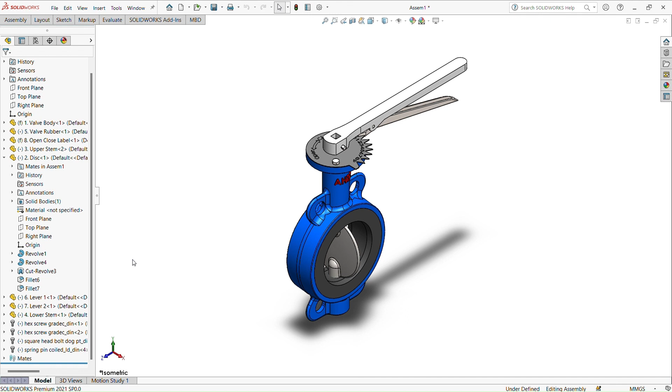So I'm going to design a butterfly valve for this project. I'm going to design a simple butterfly valve in Solidworks. I will give animation also at the end showing the open close relation. I hope sir will like it, and I'm gonna do every part at the end and then assemble it. Okay?

Alright, so this is my first part of the butterfly valve project. This is the valve body. As you can see, it's blue color, and I will explain it one by one.

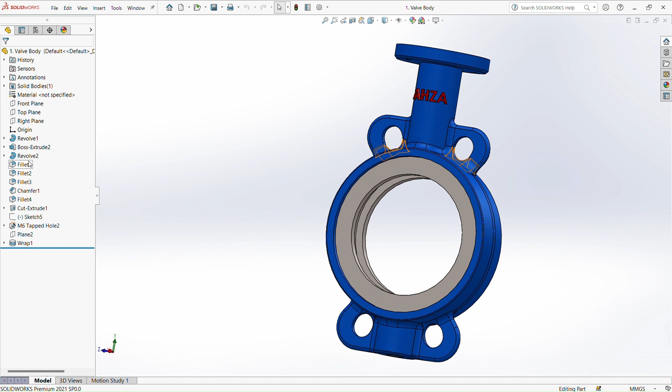Okay, we go to the revolve, the first part first. Edit sketch. So this is our first part, we created this one first. By we draw this part, and I already set up the dimension here. It's 6 millimeters. I do the right part only and the left side part actually only, because I mirror entities from here to here.

First of all, I just draw the line here, here, here, here, here, here, and here, and then I mirror entities here because I already created the center line from the top to the origin, from the origin to the left side. After I mirror entities with this axis, it will create another part here. So I already set the dimension for this bottom as 8.8 millimeters, this one 16.04 millimeters.

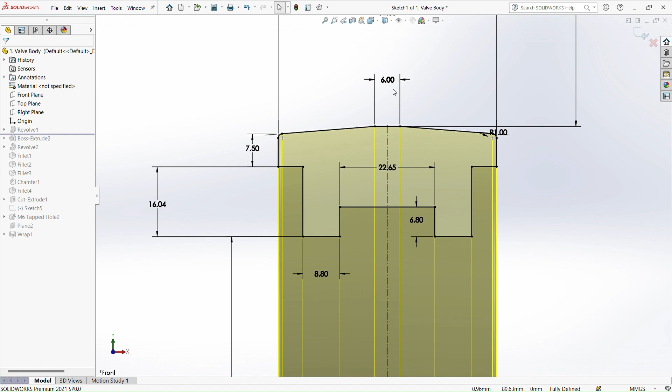Here 7.5 millimeters, and here I don't set it first. After I put the mirror entities, I put 6 millimeters, and down here is 22.65 millimeters, and from the bottom to the origin is 55.7 millimeters. Then I put some chamfer here, I mean I put some arc here for 1 millimeter.

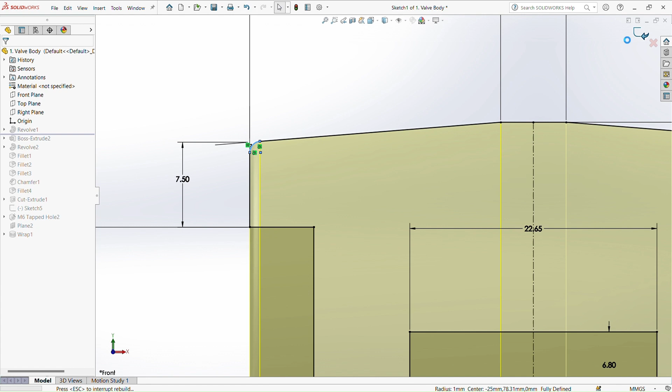Alright, so exit sketch, and then we go to the revolve part. Edit feature, we go to revolve, so this is our axis to make it round shape like this. Click OK and it's done.

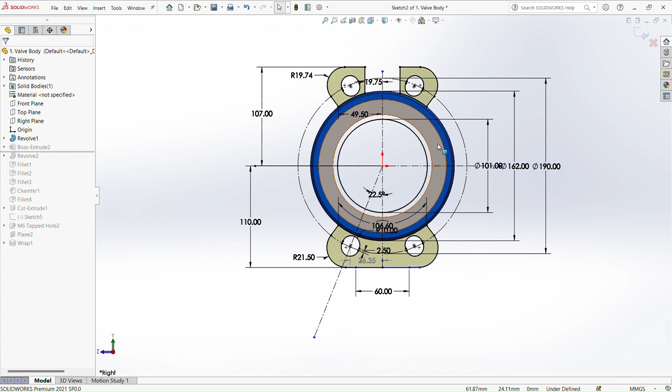So I create this using some slot, line and circle. We can see here, I just draw it freely, upside and downside, but lastly I put the dimension so it will be more arranged. Then I extruded it, exit sketch, edit feature, for 6 millimeters only.

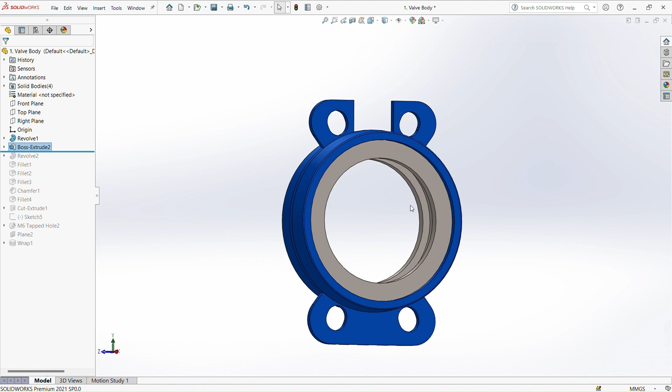Alright, now you can see the body is almost done here. We move to the second revolve, the upper part. Here we go to edit sketch. First of all, I draw the same one, save. I draw a line here, and put some dimension, 20.5 millimeters up here, 45 millimeters, here 12.7 millimeters, and from the top to the origin is 171 millimeters.

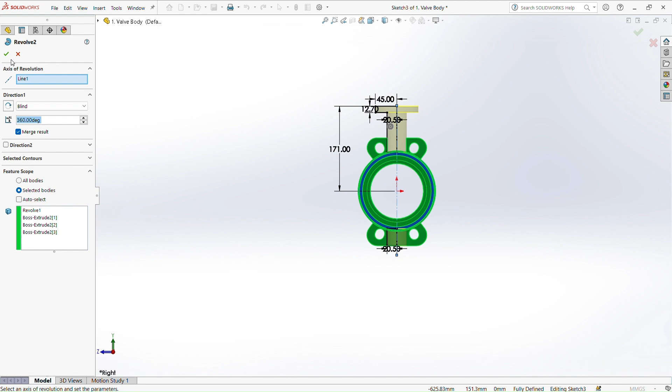And then I go to the revolve part, edit feature. Okay, you can see here I put the merge result, line and selected the bodies. Click OK. You can see it's already revolved here.

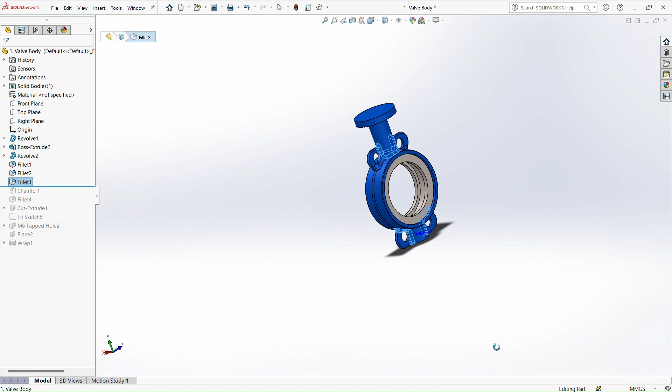Okay, we move to the fillet. 1, 2, 3, alright. You can see I put some fillet here, there's 3 fillets because I do it one by one. 1, 2, 3. I use 6 millimeters for the fillet parameters. Click OK. Now it's a beautiful fillet here, and then we go to the chamfer, which is upside and down part.

And for this chamfer, I just use only 2 millimeters. Already done. And then we go to the last fillet, which I do it late, but it's okay. Edit feature, also using 6 millimeters for the fillet parameters.

Alright, then we go to the extrude cut, because we want to make a hole from top to the bottom. For this one, first of all, we go to edit sketch, top plane, and I draw the circle up here, 16 millimeters for the diameter, and then exit sketch.

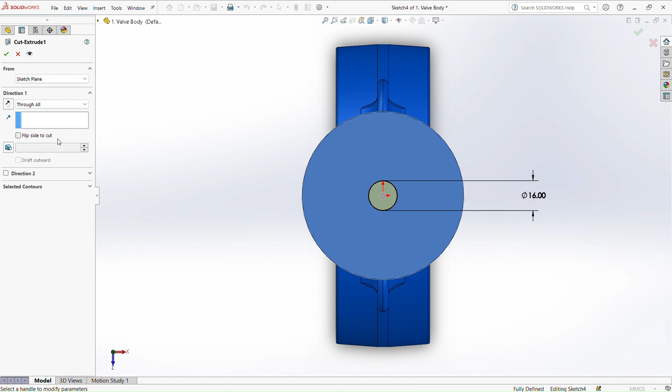And edit feature, we put through all, and it will cut all through the body like this. We click OK. Okay, we can see there's a hole through here and here.

Okay, done. We move to sketch 5. Sketch 5 is a little bit complex, but it's fine. To make it seem easy, we go to normal to. I draw the circle with center line with 70 millimeters diameter, and then I draw some lines here, 45 degrees, 45, 45, and this is one straight line, and to the left side line. Why am I doing this? Because I want to do some tapped hole here.

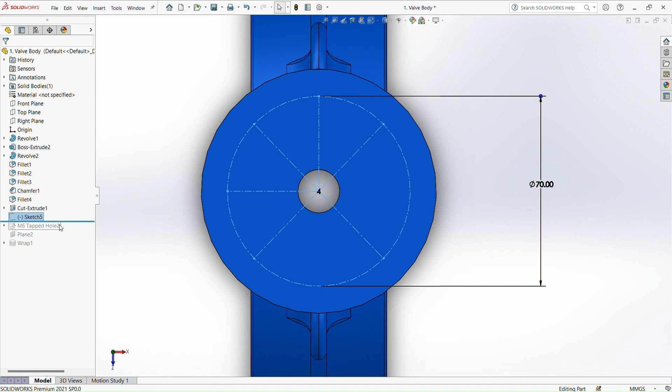Alright, so how do I do the tapped hole? We go to edit feature, hole specification, hole wizard. I choose tapped, straight, standard ISO, tapped hole, size M6.

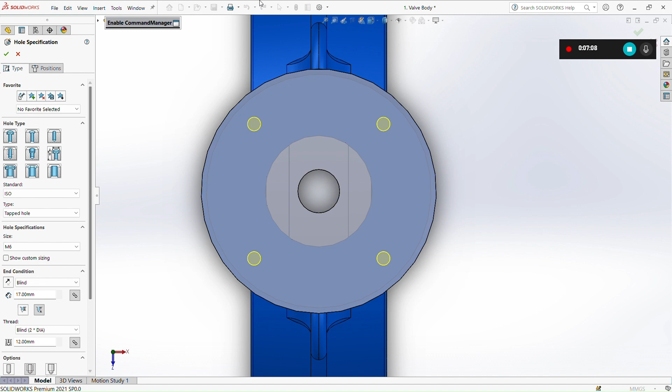Blind, and the distance is 17 millimeters. Then for position, I put some holes here, here, here, and here, which we already sketched before, and click OK, and there's a hole.

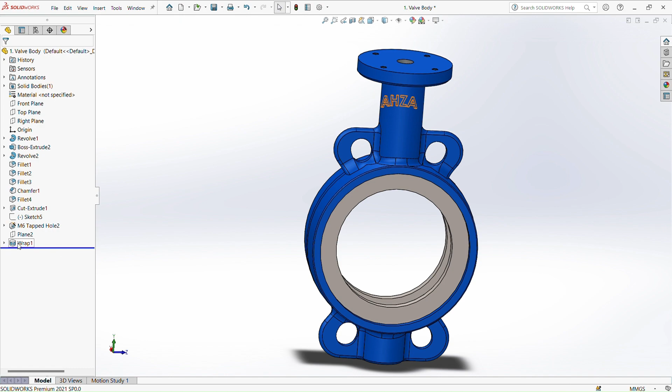We move to plane 2. The next step is I want to do some branding, which is right here. I put the right plane first, and then I go for the wrap. For this I put my own name, Ahza.

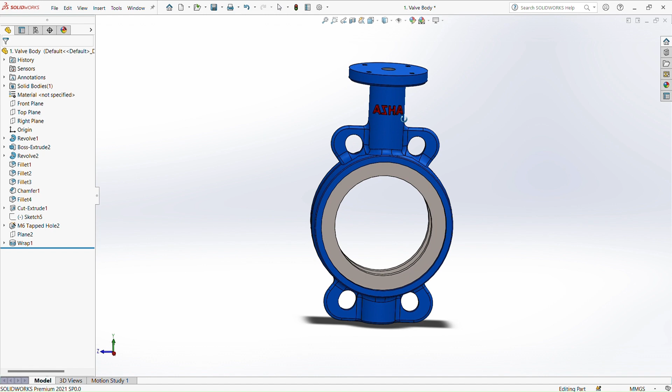I don't know why my name is already like this, but it's okay. All I want to show is how to do the branding. So we go to the wrap.

Right here, we do some writing, and go to the wrap type emboss, wrap, sketch 14, and select the face. For the distance I just put 2 millimeters.

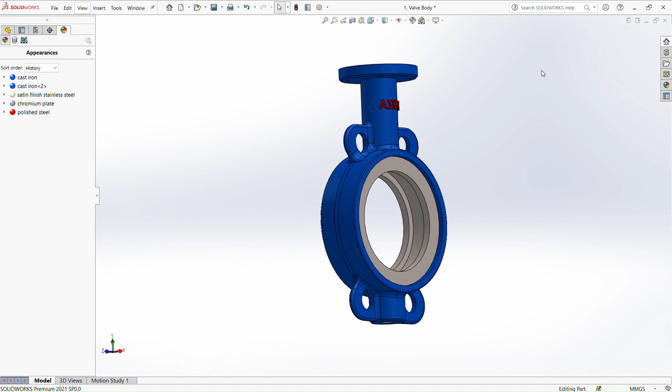So it's done, I hope you get it. Before that, for the appearance, I'm using cast iron, the blue one.

So this is my second part, the butterfly body. This is the butterfly disc. So how did I do this?

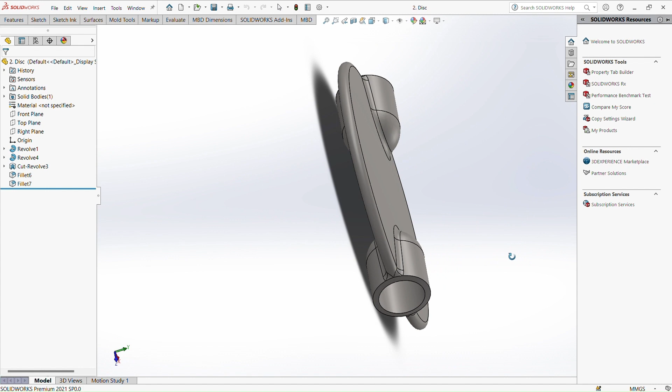First of all, I will go to the revolve, edit sketch. Then I create the center line here, using center line from this part to this part, based on the origin.

From the middle to the left side for 48.35 millimeters, then this line I midpoint using 8.00 millimeters, and at the end of this left I create the circle, which I already trimmed, with 4.3 millimeter diameter.

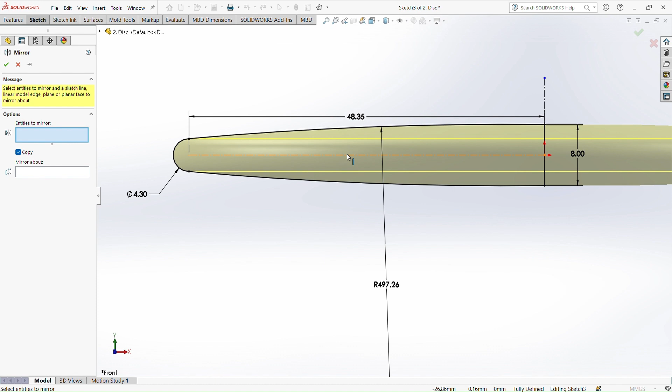Using 3 point arc, I select this point to this point and the middle point, then choose 497.26 millimeters. Then I go to mirror entities, mirror this line about this line, so I can create this arc with the same length and same radius.

Then I revolve it within this axis, and this object is created like this.

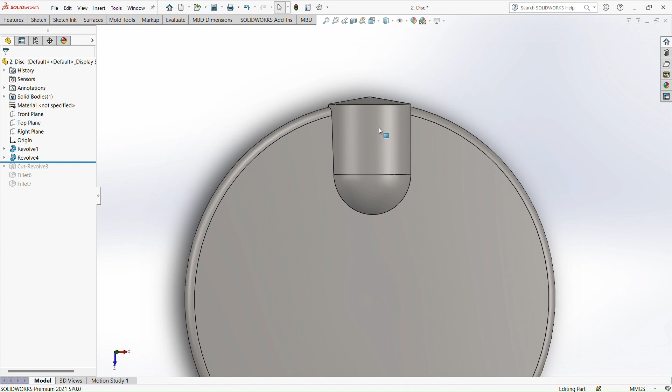Okay, we move to the second revolve, revolve 4, where we create some space here, some object here for the stem side, so this can open and close later on.

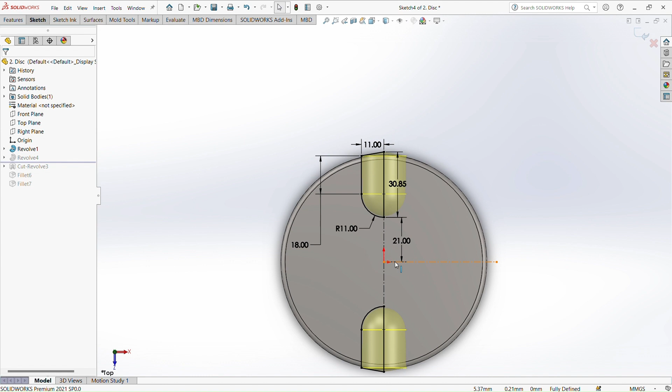So how did I do this revolve? We go to edit sketch. We can see it's fully defined here. We create the center line from the top to the bottom and origin to the right side, then using smart dimension to create 21 millimeters to get this point.

From this point we create the line 30.85 upward, then from this point go to the left side using 11 millimeters, and this point go downside for 18 millimeters, then create an arc using the line, attaching it twice, so I can create an arc for 11 millimeters radius.

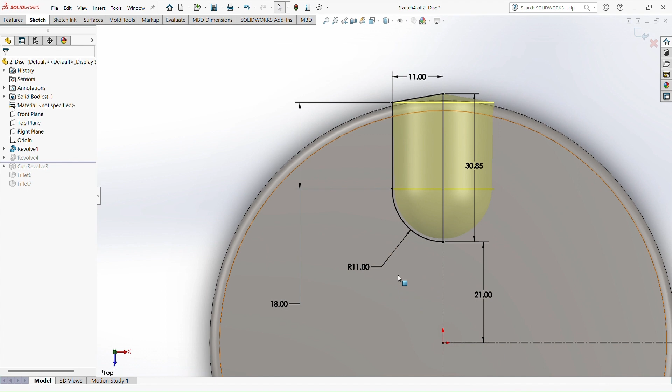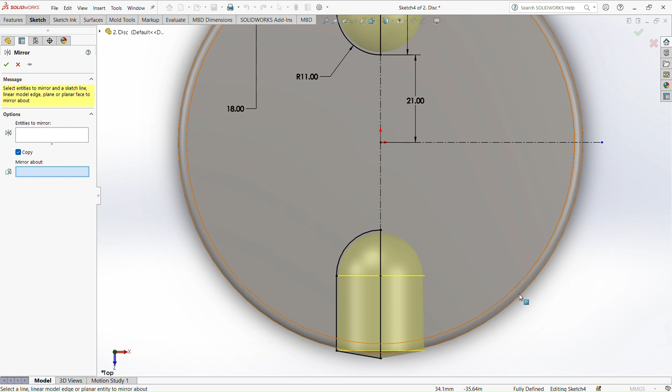Then I select mirror entities, and again copy all this line and mirror about using this axis, so I can create another sketch here without wasting time. Then I just revolve it, and you can see how it looks.

Now we want to make a hole here, inside here and inside here. So how I want to do the hole is, first of all we go to the revolve here and go to edit sketch.

I create the line here for the circle, and then I get another sketch up here. As you can see, I don't put the smart dimension over here because I want it hanging right over the circle.

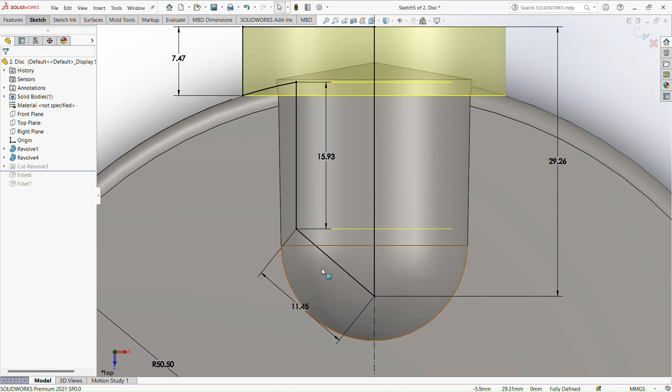So right from the circle I point here for 7.47 millimeters, go to right side 14.4 millimeters, down 29.26 millimeters, incline line here 11.45 millimeters, and then finish the line for 15.93 millimeters.

So I can get this sketch, and after that I go to mirror sketching and mirror entities, copy all this line and mirror about using this axis again, so I can create another sketch down here.

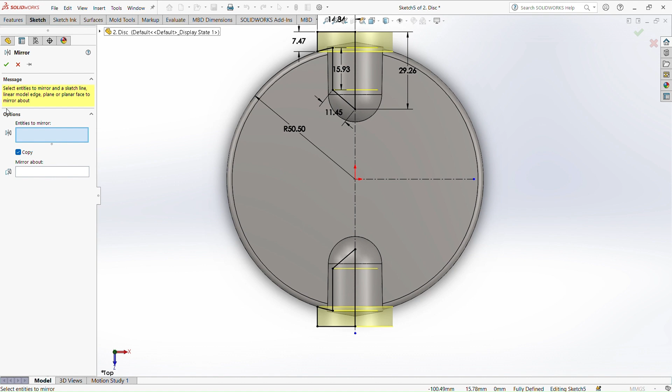Okay, we go on, so I can just cut-revolve here so I can create a hole inside it. Let me see, is it working? Okay, as you can see, I can create the hole here, a space inside here, so I can put the stem or shaft later.

Okay, move to the last part. This fillet 6 and 7 is just the same, because fillet 6 I do the down part, fillet 7 I do the upper part. I do it one by one.

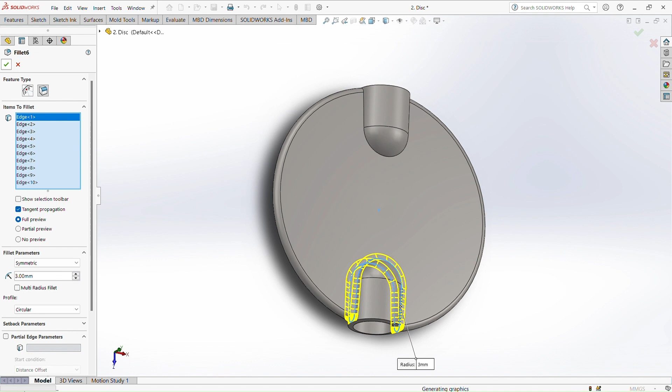For the fillet, we go to edit feature. For the fillet parameters, symmetric one, and I'm using 3 millimeters for the fillet created. Then we go to appearance, and right here I'm using polished steel for the butterfly, all this.

Okay, that's all from this part. I hope it's clear. Thank you.

Okay, now we move on to the third part, which is the upper stem for the butterfly valve. This connects to the lever, and this connects to the body. Let's see how I created this upper stem. It's one of the easiest sketches I've done here.

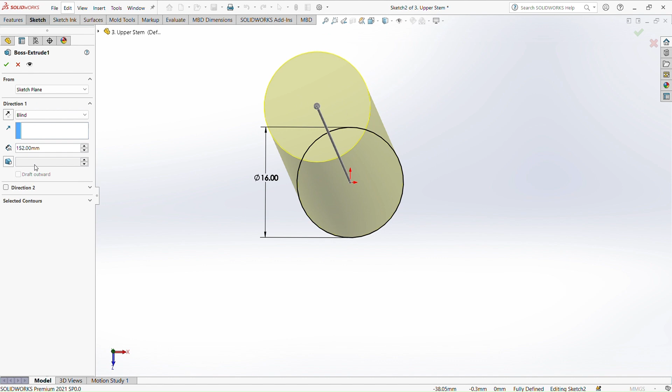So we go to edit sketch. It starts from a circle with a diameter of 16 millimeters. Then I extruded it for 152 millimeters. Click done. Now we get the shaft here, the stem, blank stem.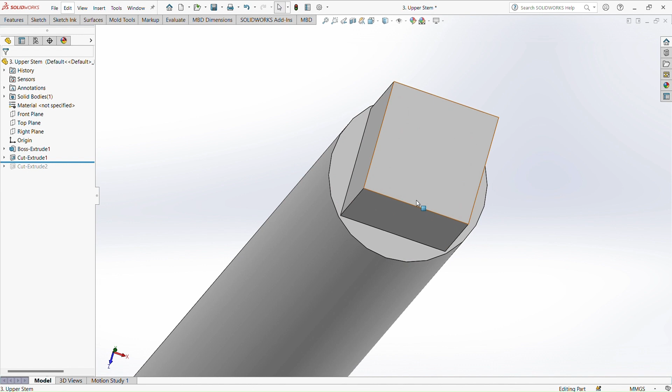Now we move to sketch extrude. I want to delete this part because I want to create a cube at the top of the stem. So how did I do this? We go to edit sketch. I created a rectangle, using center rectangle. From the origin I create the rectangle, and each side of the rectangle is 11 millimeters.

Then we go to cut extrude. We edit sketch, cut extrude, edit feature. Now the distance for the extruded part is 12 millimeters, and we uncheck flip side to cut, so the cut is on the outside, not the inside. We click done, and it worked.

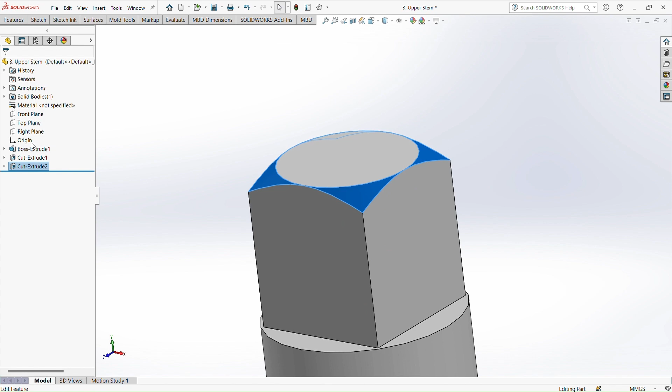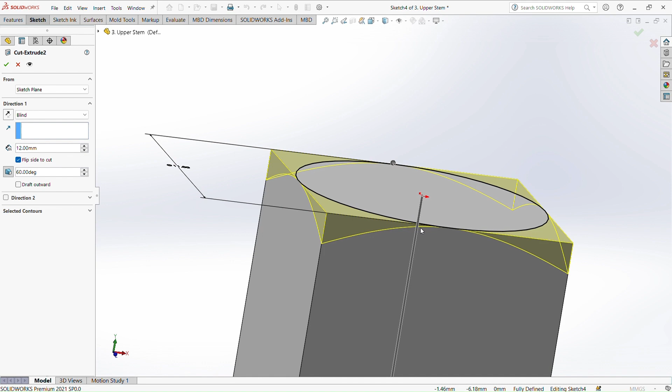The last part for this stem is extruded cut 2, which creates this kind of design, right here - nice, right? How did I do this? Same thing, but we go to edit feature. I put 12 millimeters for the distance. Then for this to happen, I put the degree at 60 degrees and check flip side to cut, then click OK. Done.

For the appearance, I'm using brushed chromium. So that's all for this part, the upper stem. I hope it's clear. Thank you.

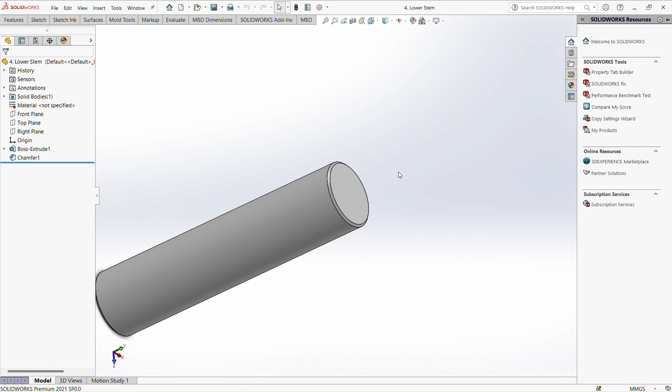Welcome to my fourth part. This is my lower stem for the butterfly valve, which we put at the bottom part of the valve. This is one of the easiest parts that I've done through this butterfly valve project. Alright, we go to the first step.

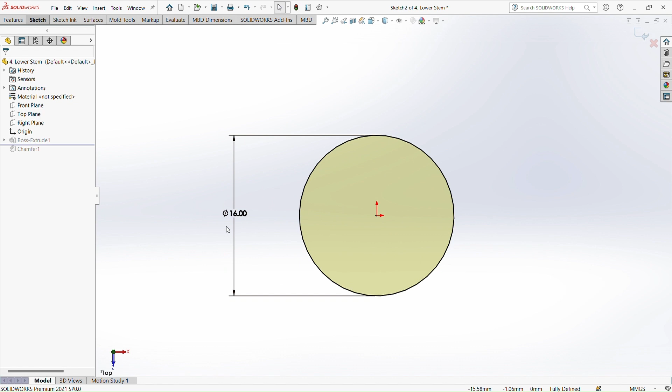As boss extruded, we'll go to edit sketch first. First of all, I did a simple circle, center circle, with 16 millimeters diameter. Then I extruded it to 70 millimeters. Click OK, and then I created a chamfer for both sides, down and upper. For the chamfer, I choose tangent propagation partial preview. The distance is just 0.5 millimeters and the angle is 45 degrees.

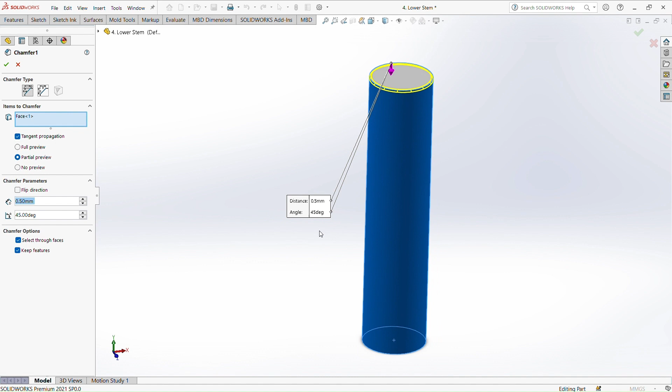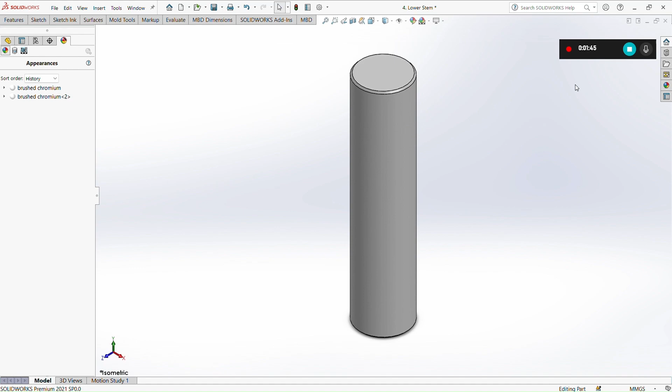Click OK for both side faces. Now it's there. For the appearance, I chose brushed chromium, so you can see here. Okay, that's all for this part. I hope it's clear. Thank you.

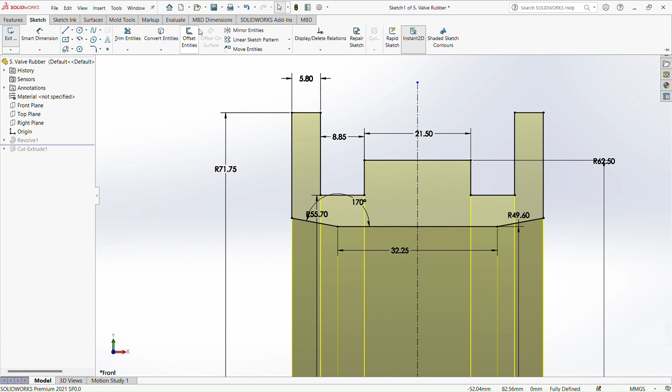First of all, I create a center line here and here, so I create the sketch. I don't create the right side, I just did the left side. How did I do this? First, I just create this line, this line, this line, and so on, then I select mirror entities for all of this part, mirrored about this axis, so I can get both sides perfectly without any wrong dimension.

At this point I created the dimensions, starting with 21.50 millimeters, then 8.85 millimeters, this one 5.8 millimeters, and the last part from the top to the center line is 71.75 millimeters. Then the middle one I chose 32.25 millimeters, and the degree from left side and right side is 170 degrees.

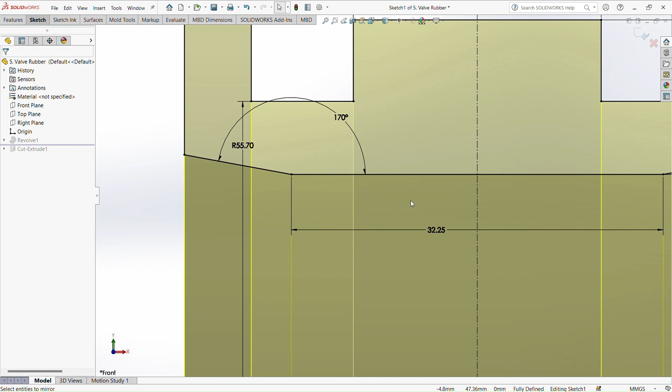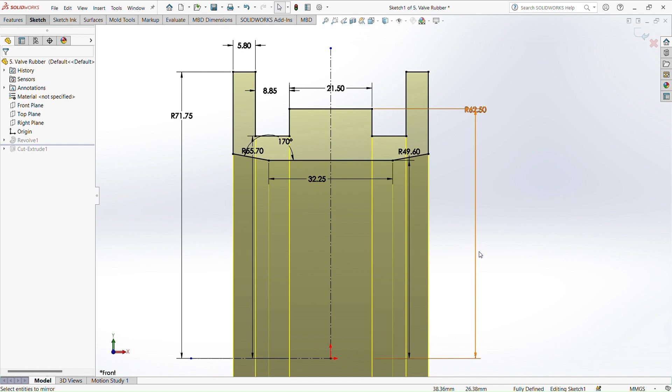Yeah, the angle, and this line to the center line is 55.7 millimeters, and also this point from this point to the center line is 49.6 millimeters, and lastly this point to the center line is 62.5 millimeters. And now I revolve it, and this is how it becomes.

And we can see the shape here, and then we go to the second part, which is I extrude the hole through all, both sides of it, so I can put the stem later.

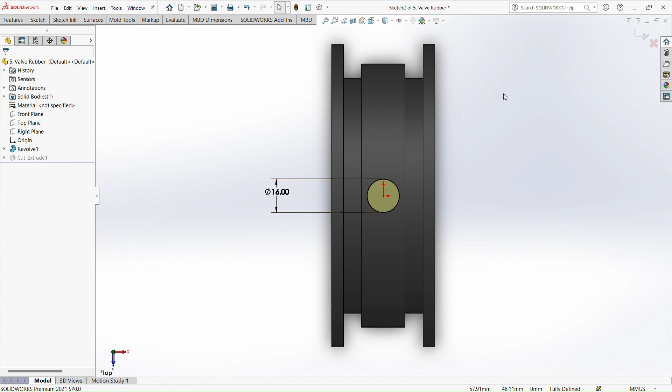So how did I create a hole here? We go to edit sketch, then to the front plane - okay, I mean this is my top plane actually. I create the circle for 16 millimeters, because our stem bolt is 16 millimeters diameter. Then I create the circle and extrude it. Go to edit feature - as you can see, I choose through all both, so I can cut through all of this part, creating a hole on both sides.

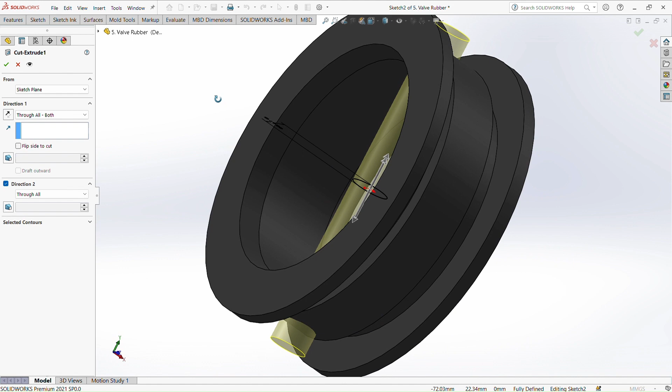Okay, for the appearance, I choose matte rubber. Matte rubber. So that's all from this part. I hope you get it. Thank you.

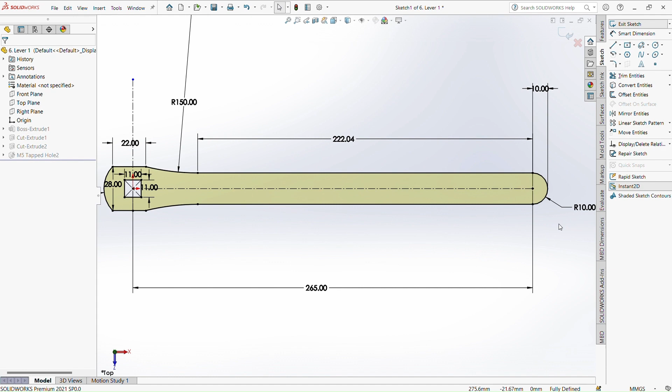How did I do this? First step, I sketch it. So this is the origin. I create a center line here to the origin, and from the origin I go to the right side. From the end of the right side, I create a circle here, diameter radius 10. And then at the center here, I create a center rectangle, which every side is 11 by 11 millimeters.

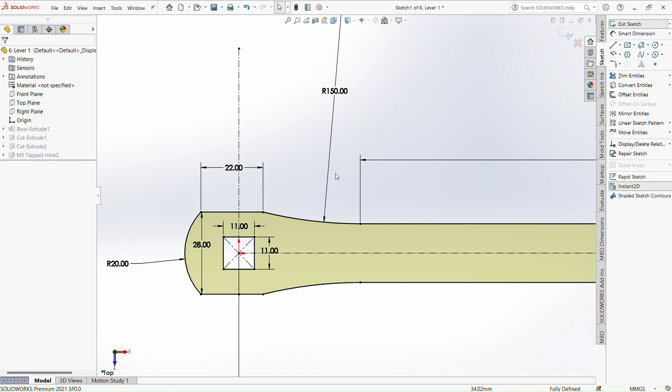And I create another line upside here, 22 millimeters, and an arc for 150 millimeters, and another line to the circle at the end of the right is 222.04 millimeters. Okay, and then I select the mirror entities here.

So I select the line, the upper line, and then the mirror about is for this axis. So I create another symmetry sketching down here. So I create an arc for here, 20 millimeters radius, and then I extrude it.

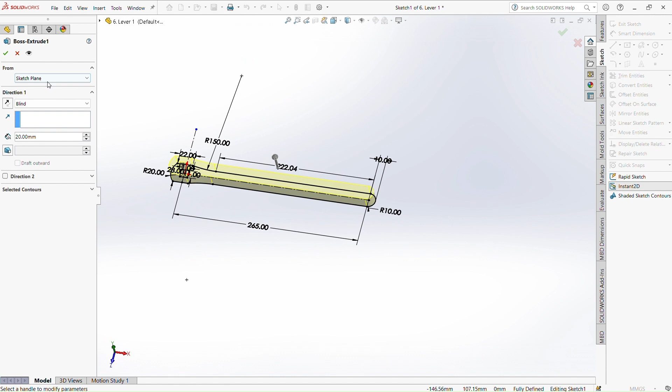Okay, I boss extrude it. For exit sketch, boss extrude for 20 millimeters. 20 millimeters sketch plane. Okay, click done, and then we move to the cut extrude.

Edit sketch. So right here, I create a line - wait, why does it show undefined? It's okay, let me put some smart dimension here, it's not here yet. This one - actually it never mind what dimensioning, because we want to cut all above here. Okay, you got me.

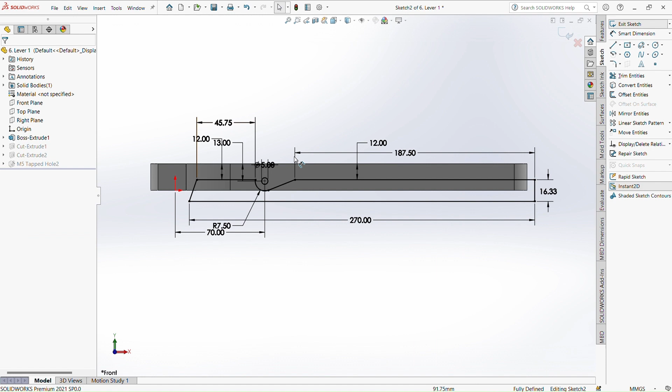Okay, now it's fully defined. So click done. Okay, so we create this sketching. So this one, I got 45.75, and I sketch a small circle here for 5 millimeters.

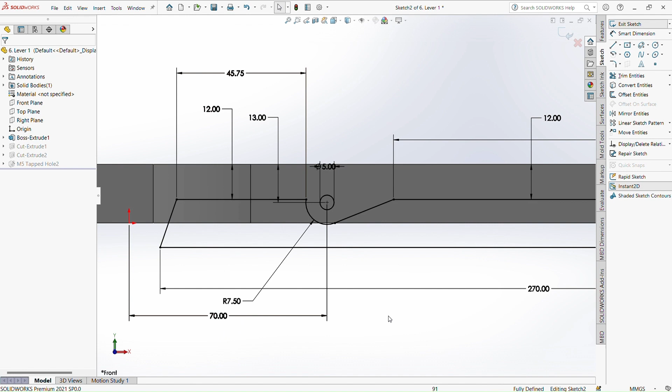And how to smart dimension - it's from the center to the origin for 70 millimeters. So this is the important part. And then I go to this line, circle again for 7.5 millimeters, and another line here. Do I need this? Okay, because I already set the length of here 270 millimeters, and here actually never mind.

I choose 16.33 because that's why it says underdefined, because I want to eliminate the down part here. So when I do the cut extrude, I can see here. All right, yeah.

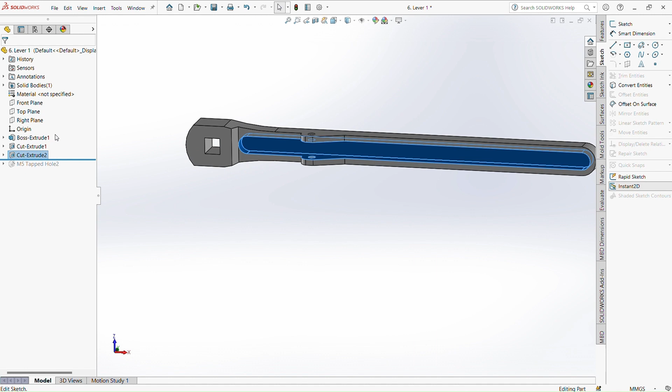Okay, we move on to the second part of cut extrude, which is I want to eliminate all inside here. So how do I do this? We go to edit sketch. I create the - how to remove this, it's okay lah. No, it's not ellipse, how confusing earlier.

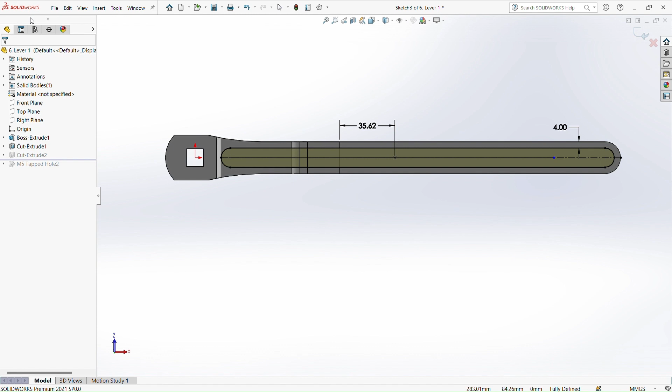Okay, so I pick the straight slot here, just freely input, and then oh my god. Alright, so here I put this. I select the slot, okay lah. Select the slot, and then I create here for...

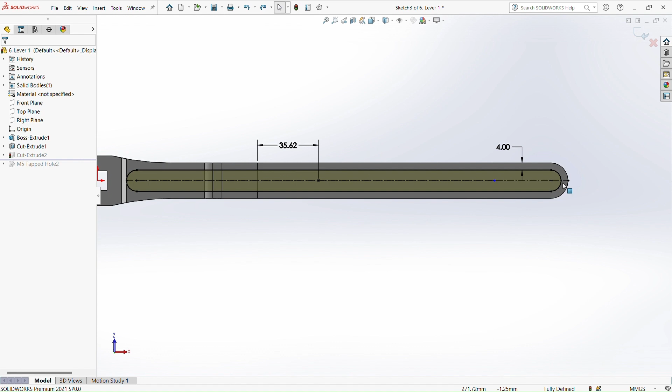35.62 millimeters from the origin, from the middle line, and then this clearance is 4 millimeters. This also 4 millimeters lah, but this one needs to touch the end of the line. So when we cut extrude the sketch, you can see how do I eliminate the inside part.

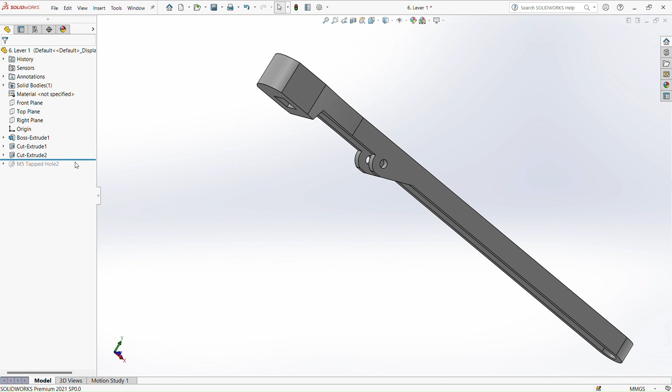Okay, we move to the tapped hole here. So the edit feature for this one is - first of all I select the hole wizard, and then it shows this part, and then I pick the straight tap ISO tapped hole. The size is M5, and the distance is 14 millimeters, and I just put the position right above the origin part. Okay, so I click done, and then there's a hole here.

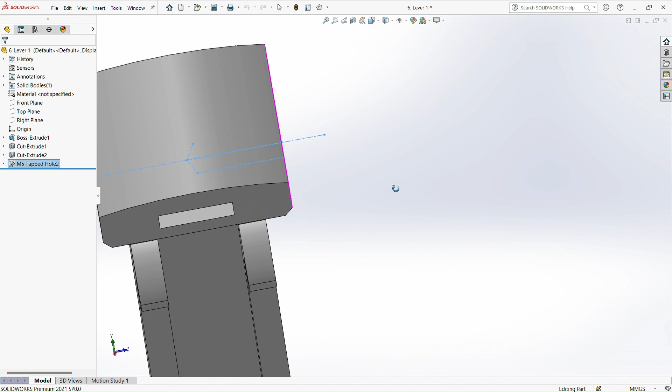It's just one part lah, it's not through all. Okay, and for the appearance I choose brush chromium. Okay, wait, alright, everything is plain.

Okay, that's all from this part. Thank you, I'm sorry if it's not clear, but I hope you will get it, what I'm trying to say.

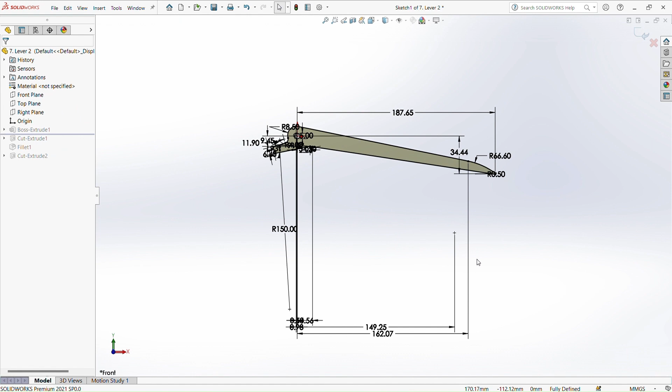Okay, so this is my seventh part, which is a Lever 2. Let me start here. Edit sketch. Okay, it's kind of complicated, but it's fine. You can see it's a fully defined sketch here.

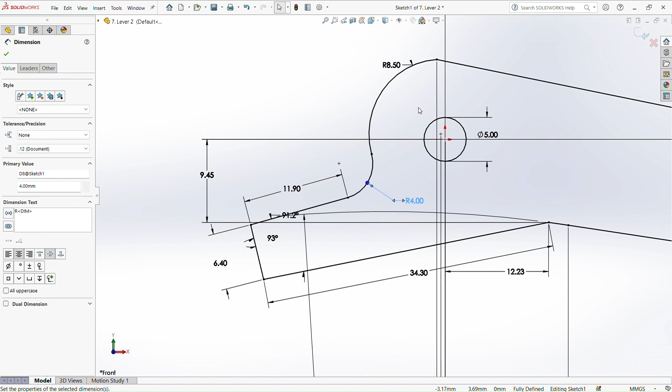So from the origin, I draw the circle first, and then I draw a line freely pointed here for 12.23, for 34.3 millimeters, and then here 6.4 millimeters, and here 11.9 millimeters, and the arc 4 millimeters for radius.

Also up here 8.5 millimeters for radius. And then at this part you can see here 162.07. Okay, and then I got some arc again here for 66.60 millimeters, and here I get a chamfer for 0.5 distance.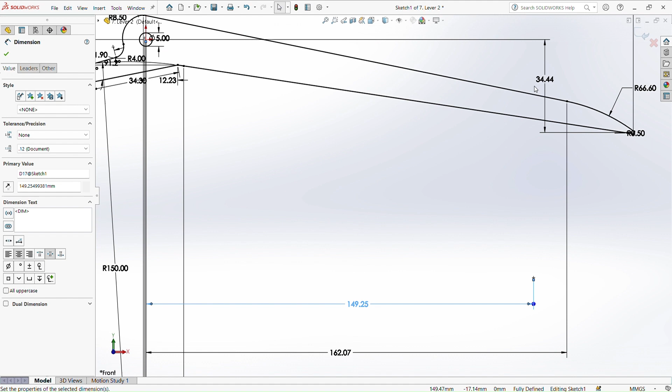And this one I get a length from the origin to this part for 34.44 millimeters, and then another line here, another line here for 12.23 millimeters, and lastly 34.3 millimeters.

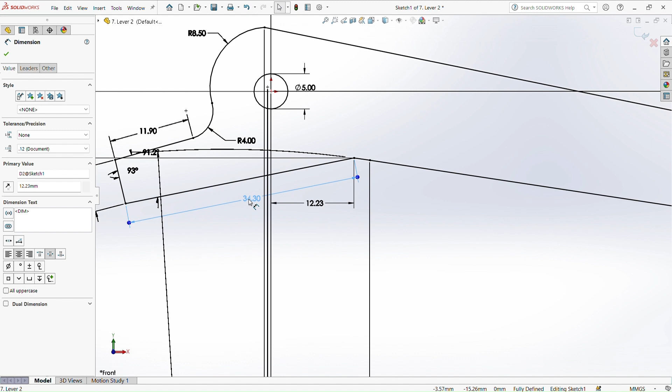Okay, and then I go to the boss extrude, add this feature for 11.5 millimeters. So this is how it becomes. Click done, control 7. So it's the body of the lever. Okay, we go into the next step.

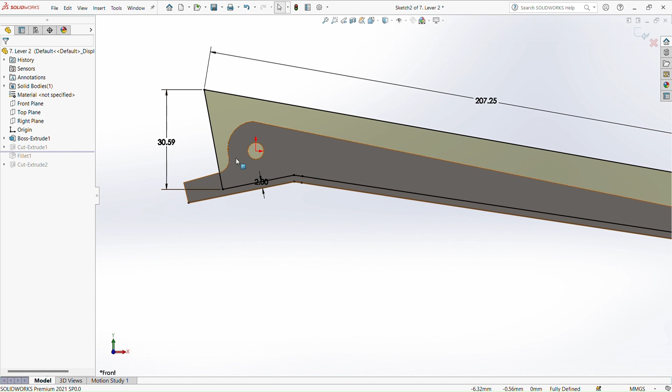We cut extrude here. Okay, how do I eliminate the inside part? So we go here, edit sketch first. Okay, first of all I draw the line 1 2 3 4 5 6. Okay, and then I also put their dimension, which is 30.59 millimeters, 207.25 millimeters, 17.02 millimeters, and the clearance from this part is 2 millimeters only.

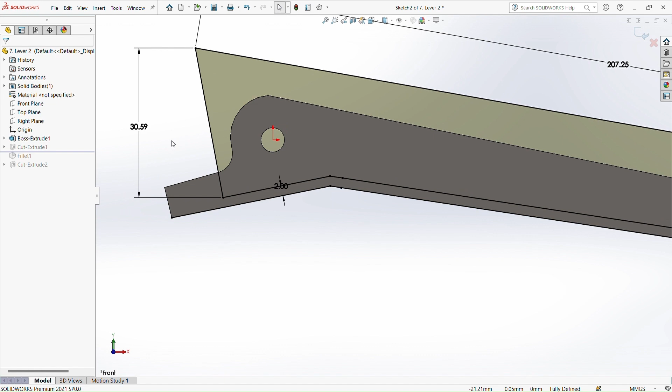And then we go through the cut extrude, but this cut extrude gets a little bit tricky, which is you need to change the direction here to the mid plane. Okay, mid plane, so it will extrude the inside one. Click OK. Now it's already eliminated.

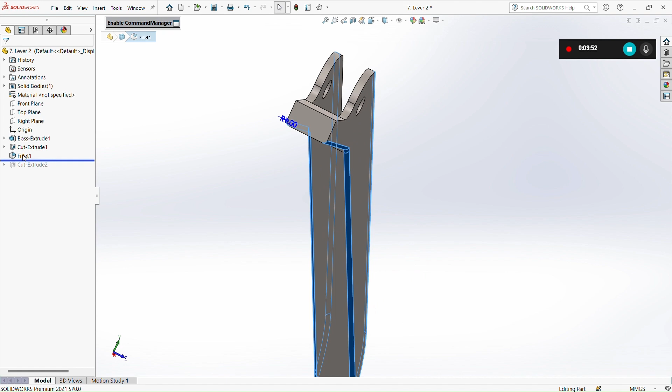Okay, sorry, we move to the fillet, which is I do the fillet over the blue part. Here, and then for the fillet parameters I put only 1 millimeter. Click OK, then your fillet is done.

And lastly, your extruded cut, which is the front part. Okay, extruded part. So how do I do it?

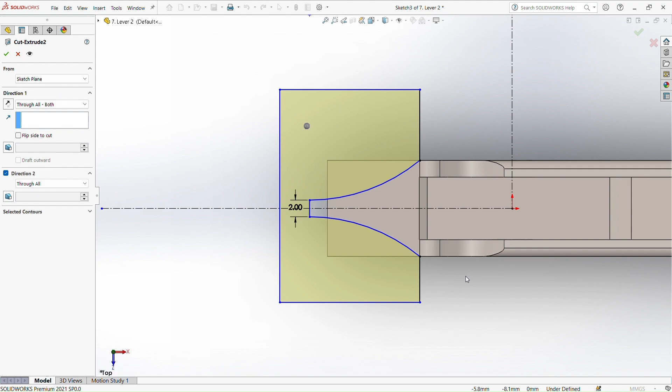First I edit sketch. Okay, first of all, I draw the line, and then I do some mirror entities here, and the clearance is 2 millimeters. And then I go to the extruded part, edit sketch, edit feature. So you can see here I put through all both, so it will eliminate both sides of this part. Through all, click OK, and then it becomes like this. Control 7 isometric, so it's done.

Okay, hello sir, welcome back. So this is my last part of the butterfly valve. This is the open close label.

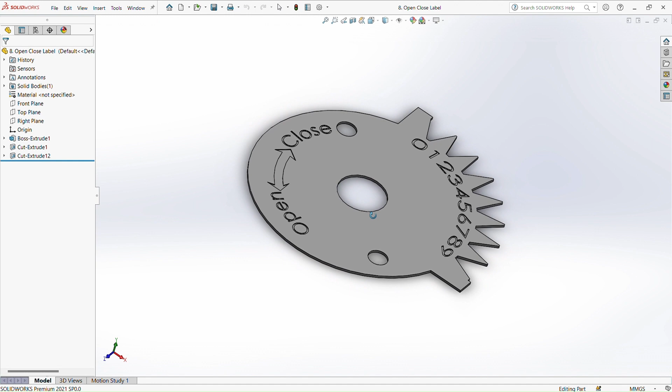Let me move on to the edit feature. No, sorry, we go to the edit sketch first. So here you can see I draw the circle in the middle from the origin for the 20 millimeters diameter, and then I draw another big circle for 90 millimeters diameter. And then I draw another circle up here, a distance 35 millimeters, and the circle is 8 millimeters.

So I use 45 degrees for the angle, so I can decide where to put the hole, and then another hole here. So I'm using a mirror entity actually, but I already trimmed the center line here. Okay, from this right corner, right upper part is a sharp part, which is I do a little bit difference.

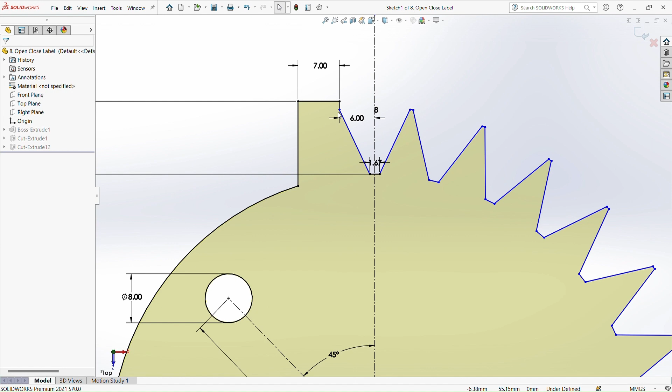It is underdefined because I'm not smart dimensioning all of this part, but actually it's already dimensioned. Okay, right here you can see I draw a line, another line here, line, and repeat the same thing until here. So the clearance is 1.67, and the clearance from another is 6 millimeters, and up here is 7 and 7 millimeters.

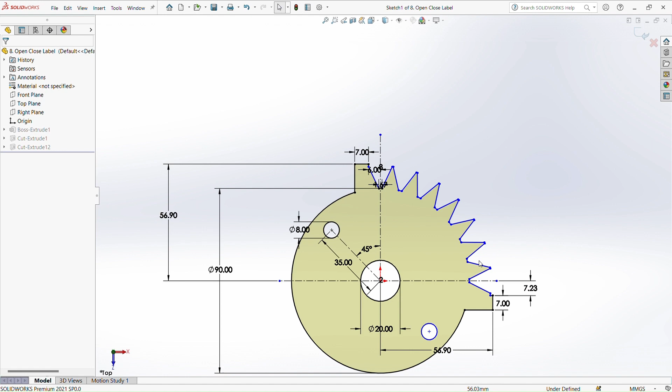Also, the distance between origin to the top part is 56.90 millimeters, and also here 56.90 millimeters. So, and then it's time for the extrude, boss extrude, and for the boss extrude, I use 1 millimeter only. Click OK. Alright, you can see there.

Sorry, I'm not expanded. So we're done with the plate, and then we move to the cut extrude. Okay, how did I do the cut extrude part?

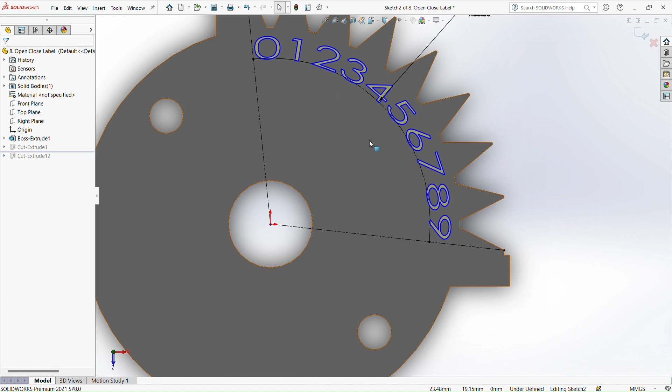Okay, first of all, I choose the hole wizard, and then I go for the tapered hole. No, wait. Alright, so now I get it. It's not... it's underdefined because I get a lot of numbers here, but it's okay.

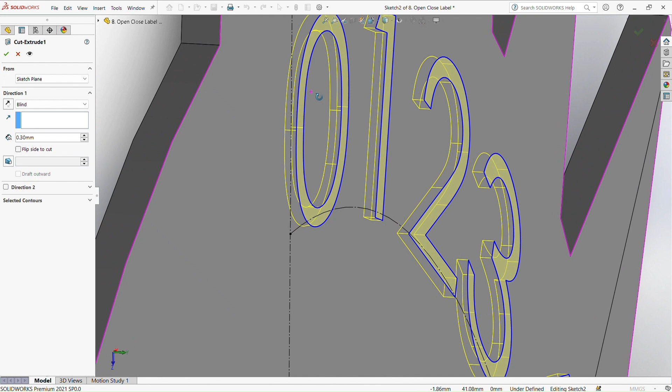Okay, done here. Edit sketch. We go to the edit feature. So at the edit feature here, you can see I extruded it only 0.3 millimeters inside. Click OK, and then we get a number here.

For the last part is I write open and close writing here. It's the same thing, edit sketch right here for the angle 127 degrees, and this is I'm using a slot and a line only. Now I write the letters here, open and close, exit sketch.

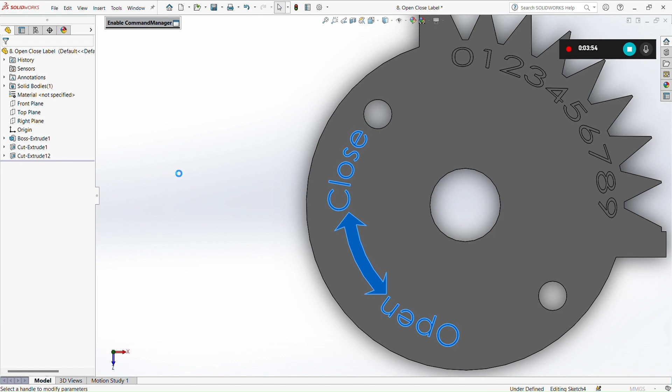Edit feature. The same thing, 0.3 millimeters I use. Click OK, and that's all for the open close label. And the appearance I'm using is brushed chromium. Okay, that's all. Thank you.